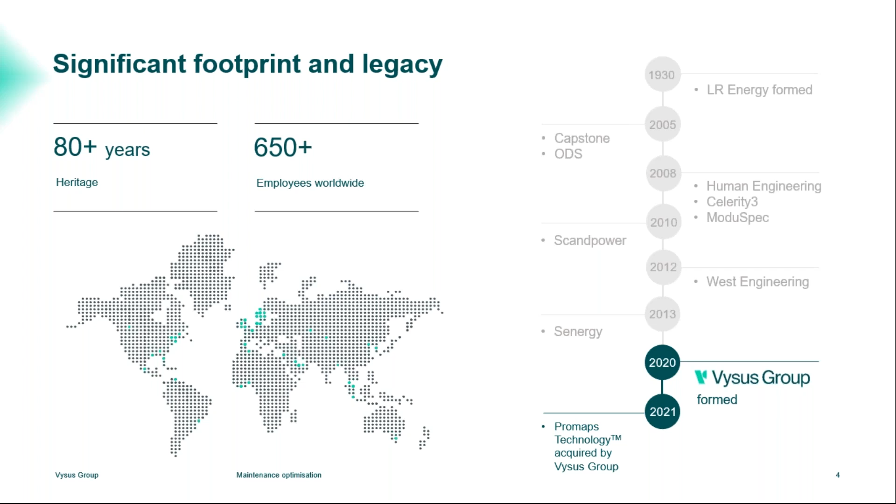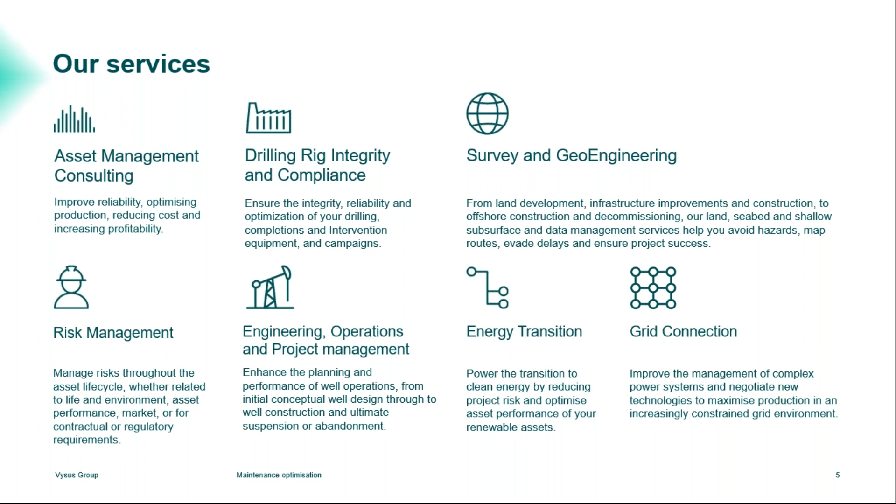Okay, those of you who have seen anything that we have published on the maintenance optimization, or you may even have seen my very short video on it that we have available on our website, will know that we actually get some pretty impressive results. And I'm going to just start by going through a couple of case histories to remind people of some of the stuff that we have published in the past.

So we did some work on an FPSO for some maintenance optimization. We looked at some 5,000 planned maintenance activities over a 6-month period for a Sevan 300 type FPSO. We actually looked to determine revised maintenance intervals. We had validation workshops for those, held with offshore and onshore personnel, prior to actually updating the routines in Maximo, the CMMS that they had.

The results of that gave a net reduction of planned maintenance of over 40%. We incorporated the classification society requirements and additional planned maintenance introduced for production critical water injection equipment to fill some gaps that we picked up.

For another client, we were focusing on their electric motor maintenance. And here we were actually looking to see which items need to be maintained, which could be run to failure with minimal adverse consequences. And again, we used software tools to provide optimized maintenance intervals for the low voltage population, and that took 3 weeks and included 970 motors.

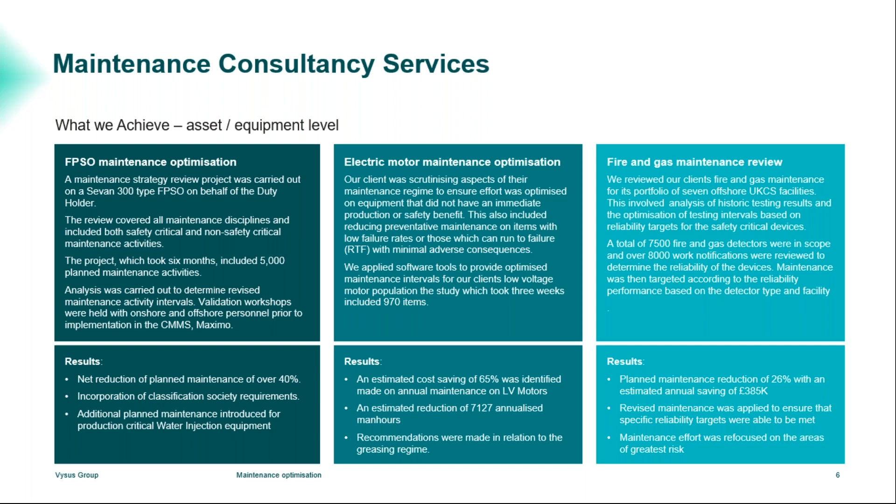If you take that to a corporate level, we did one review for a major operator in the North Sea. Across all of their assets, they had an annual planned maintenance of around £100 million of OPEX and 390,000 man hours a year. We looked at a number of key target areas from their systems, looking across their metering, inspection, valves, pumps, motors, etc. And we identified savings of around 74,000 hours and around £22 million of OPEX to actually reduce their costs.

So as I say, some pretty impressive savings can actually be made by going through these types of processes, but you don't actually always have to start right at the deep mathematical side. So just showing a slightly different example here. This was for a North Sea operator looking at a number of their safety critical work instructions on an FPSO.

And then identified that around 624 was their initial starting number of work instructions. But actually, when we dipped into those to review them, we found that there were around 286 of those that weren't actually SCE. So that was leading to an incorrect focus and prioritization of work. This work was being treated as SCE when it actually had nothing to do with meeting the assurance standards and the safety function. So that left only 338 work instructions.

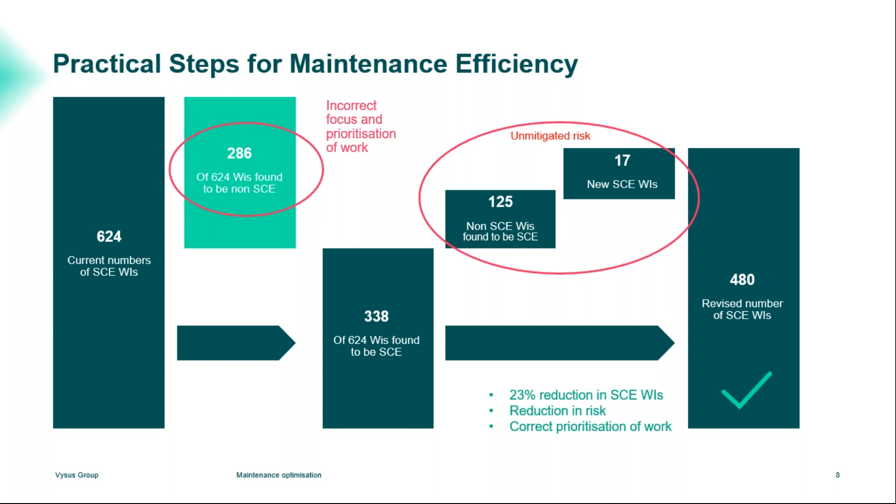So what are we trying to do? So the ultimate aim is to actually do the right thing, maintain the equipment in the right way, at the right time, so when it needs it, and do it right first time and safely.

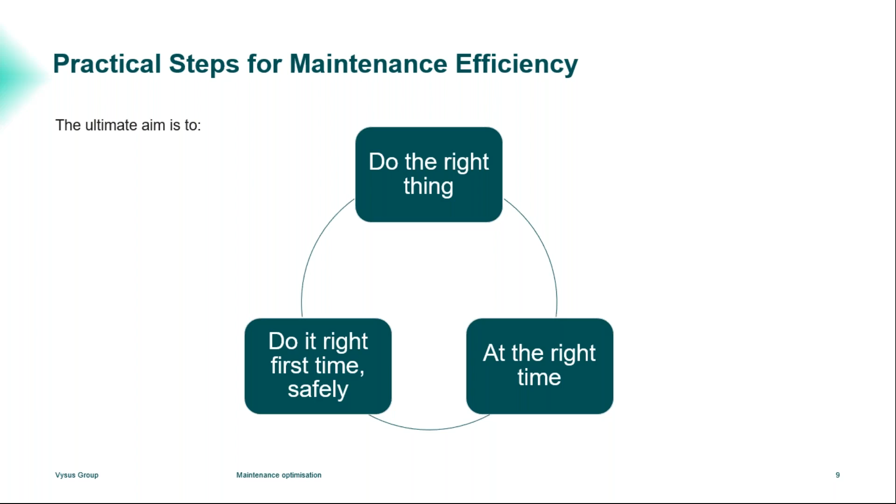So when you're actually looking to do your maintenance optimization, these are some of the questions you might want to start with. So how often should your maintenance tasks be conducted? Should you be doing it daily, monthly, every year, every 2 years? Well, who actually determines that? More importantly, how is it justified? And in that justification, are you actually setting the grounds to be able to drive continuous improvement going forward and improve things further?

It's all planned the same, and of course, where do you actually get started? So hopefully I'll answer some of these questions in the next couple of slides, where we're demonstrating how we actually make the decision of how we do and when we do the maintenance, how it's justified and recorded for continuous improvement going forwards.

Other aspects you might want to consider include things like, how do you minimize disruption to your production manufacturing process? Where can you replace intrusive maintenance with condition monitoring? One of the topics very close to my heart. How do you do the optimal frequency and duration of your intrusive tasks and condition monitoring?

What potential overlaps do you have in your plant between, for example, your operator checks, pre-use checks, and standard weekly, monthly schedules? So if every day the operator goes out and checks the oil levels in the crane before you start it up, are you really getting much benefit out of doing a monthly check on that? But you are definitely getting a benefit out of doing a condition monitoring oil sample task. So it's just making sure that you're making best use of the routines that you've got to credit them against maintenance activities that may not be required.

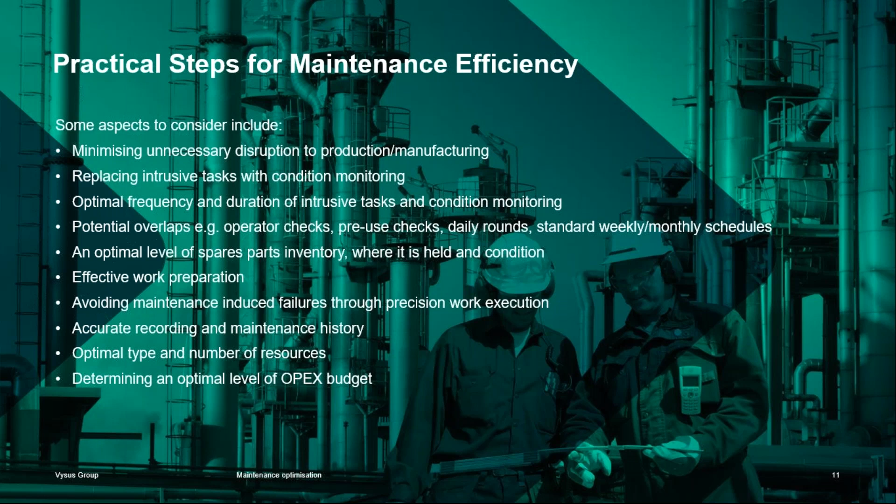So to answer the question, where do we start? Where we normally start is with what we call a facility analysis, which is a high-level overview of the distribution of your program, your scheduled upcoming PM work. And we've got a unique way of drilling down to represent and display the CMMS content, and it allows us to quickly identify improvement opportunities and look at how we can focus our effort going forward.

So it really consists of a process of data manipulation, getting the required data from your Maximo or SAP system, your PM tables, routes, etc., and process it into a format for review. We then go through and we categorize it by what is being maintained and who is doing that maintenance by discipline and interval. We then have an engineering review of data to identify opportunities, and then we sit down and we present and discuss the priorities with our actual clients.

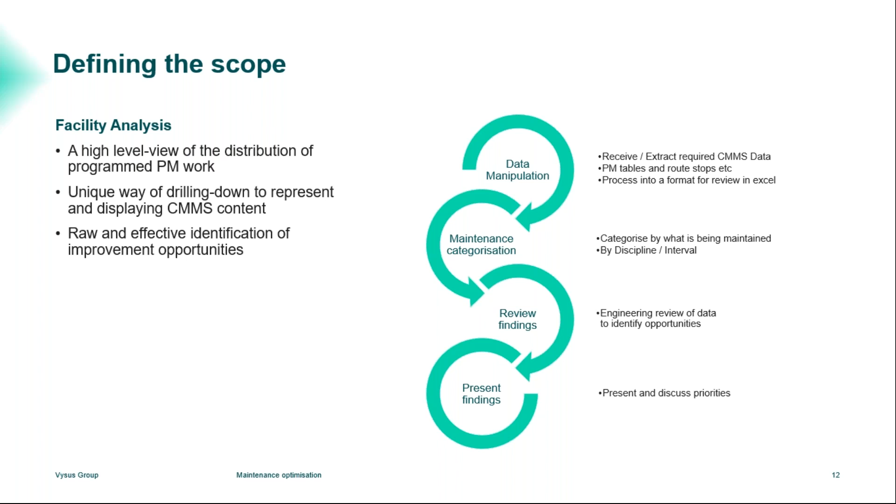And having gathered all the data and actually pulled it together, we have a number of ways of slicing and dicing it to help determine what is the core focus for the asset and the client in question. We may, for example, want to look at the maintenance hours by focused equipment system. So how much time are we spending a year on our cranes, on our fire and gas detectors, PSVs, etc.

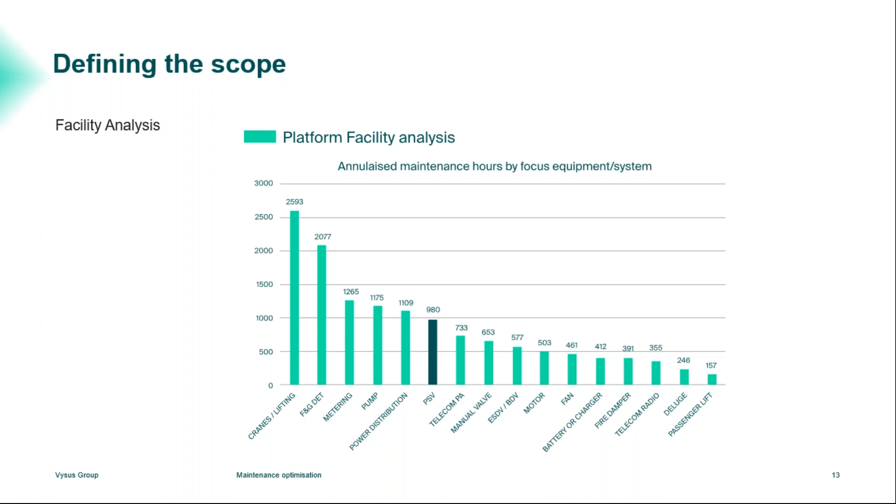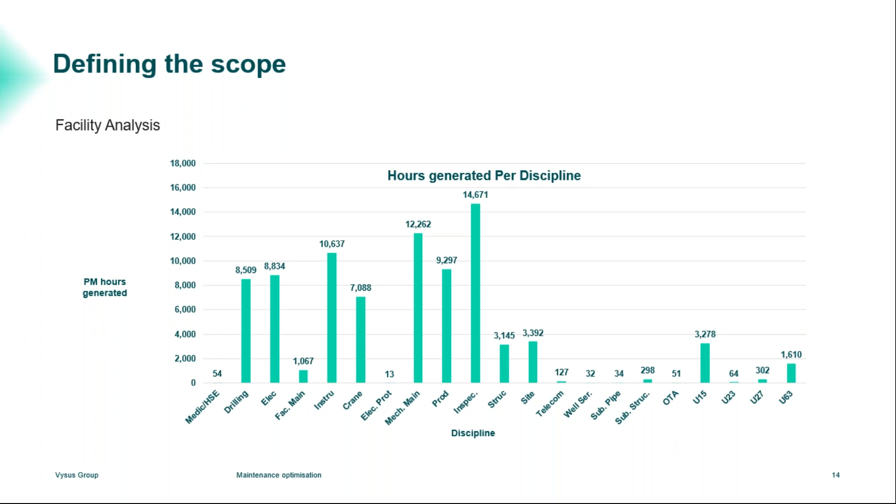Or the issue for the plant might actually be that they know they've got too much instrument maintenance, which is very unusual, of course. So we can actually look at discipline. We can look down to see who's spending most of the time. And if, for example, it is the instrument techs, we then know to focus the review on the instrumentation routines.

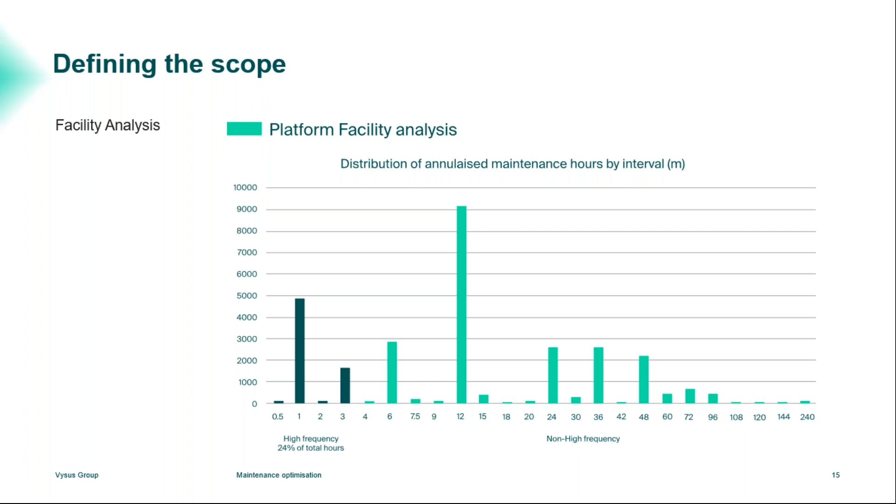Finally, here I'm just showing it by the interval that the task was conducted. So in this particular plant, we found that 24% of their annual hours was spent on routines that were generated monthly or 2 monthly or 3 monthly or less. And again, that gave us a clue as to where to go and look and start to see what we could actually improve.

Having determined what we are going to look at in terms of the optimization, we really have 2 ways of doing it. The first that I'm presenting here is a target optimization, and this tends to be used when we're looking to define an equipment test interval to meet either an agreed reliability or availability target, and is used predominantly for safety systems such as fire and gas detectors, emergency shutdown valves, safety instrumentation, PSVs, etc.

And the calculation inputs that we have is our current test interval, our reliability or availability target, and our equipment failure rate, preferably calculated from the actual asset itself. That failure rate has, of course, to be relevant to the task that we're actually optimizing. So say, for example, if I take the example of PSVs, we actually test them to look for them failing to open on demand in the dangerous failure mode.

So when we're actually doing the analysis of the failures over its operating history, we're actually only looking at dangerous failures where the valve failed to lift during a pop test, not leaks and lifting at low pressure, because that's not what the test is looking for. And what we get out is a nice little graph showing us our optimized test interval, and a bit of sensitivity analysis to show us, if we're a little bit out in our failure rate, for example, the effect that would have on our results.

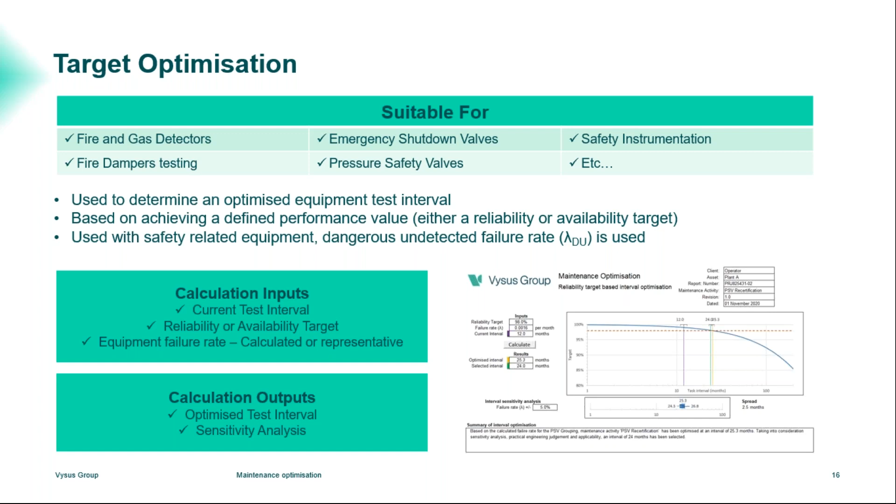The other way that we have of looking at the optimization is cost optimization. And that tends to be suitable for things such as our electric motors, our pumps, instruments, centrifuges, compressors, fans, etc. And what we're doing here is we're determining the balance between direct maintenance costs and the risk cost, for example, the cost of doing your maintenance versus not doing, to look for the lowest cost of ownership.

So again, the inputs for this are the current test interval, our cost of actual maintenance, which includes the man-hour cost, the materials, and any production loss associated with shutting down the equipment to maintain, our equipment failure data, including the failure rate, and then the cost of failure in terms of hours, materials, and production loss, again, should the machine fail. And what it does is it runs an algorithm in the back to simulate your costs and works out your best balance for your maintenance interval to reduce the costs. And again, we get some sensitivity analysis with this as well.

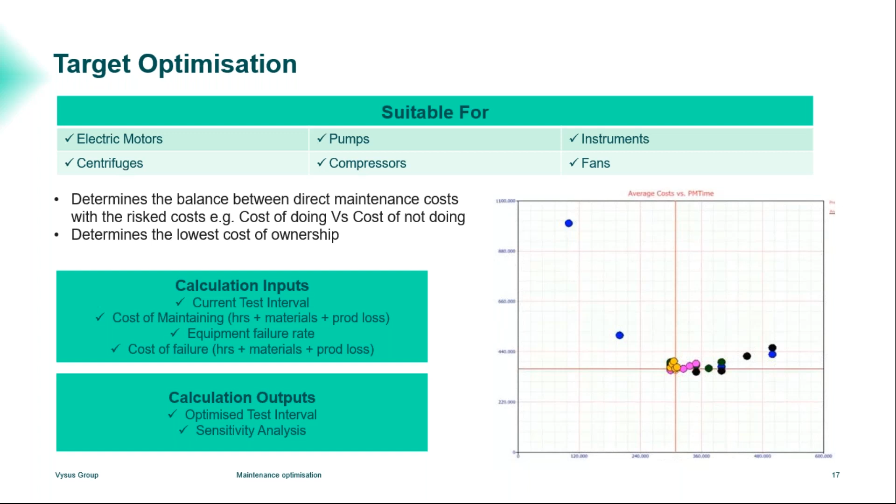So I've spoken about failure data a number of times. Obviously, for our failure rates, there are a number of published industry reliability data sources available. But the best way to actually optimize your plant is to use your own operational data. So the process that we would go for is to look at an extract from your CMMS, your work order history, including long text, processed into a format for review. We then do a fairly deep dive into it. Failure codes we find give guidance, but they're not really enough to do the full identification of what has failed and why, for various reasons. But that's a separate subject in its own right.

We then calculate your failure rate, again, based on our relevant failures and operating time. And going back to the PSV example, if I'm looking for dangerous failures, extracting them from your pop tests and certificates is actually relatively straightforward. It can be a little bit time consuming, but it's not particularly difficult to do and can give results quite quickly.

A side product of what we're doing identifies bad actors, but don't do maintenance optimization to resolve bad actors. They need a different process. I would suggest starting with a detailed root cause analysis of your bad actors to work out why they're going wrong, because optimizing the maintenance very rarely will actually solve anything for them.

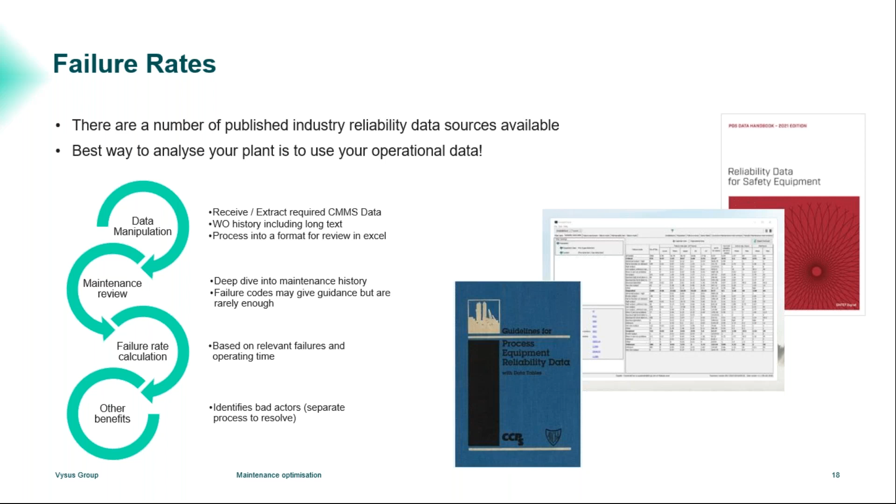So, in summary, before I go to questions, the savings quoted at the start, around about 27 million achieved for one operator. Sounds like a huge amount of effort, but by doing what I've just demonstrated, by doing the facilities analysis, by focusing the effort, and to some extent funding the ongoing project from savings from the initial low-hanging fruit, we saved that £27 million with a 10-month project at a cost to the operator of around 200,000. And these were on assets that have been operating in the North Sea for quite some while, and have been very successful in reducing those costs.